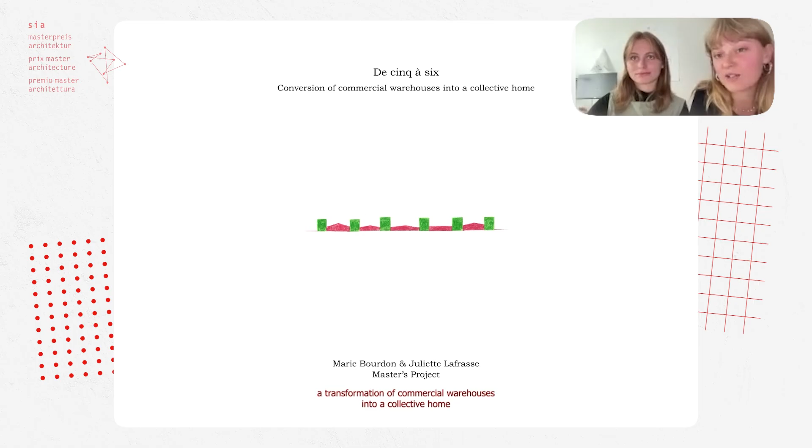For this project, we looked at a specific type of place: commercial zones, suburban areas composed of large retail warehouses and vast parking lots. They are progressively becoming obsolete, functionally but also in terms of values, as they embody a car-dependent and consumption-driven model. Yet in countries such as France, they have proliferated since the 60s and now cover more than 500 million square meters. The question is, what should we do with them?

Besides these two physical qualities, the commercial area endorses a key role in this monofunctional peri-urban area, where individual housing neighborhoods have been planned without any public spaces. They nowadays act as centralities and social hubs.

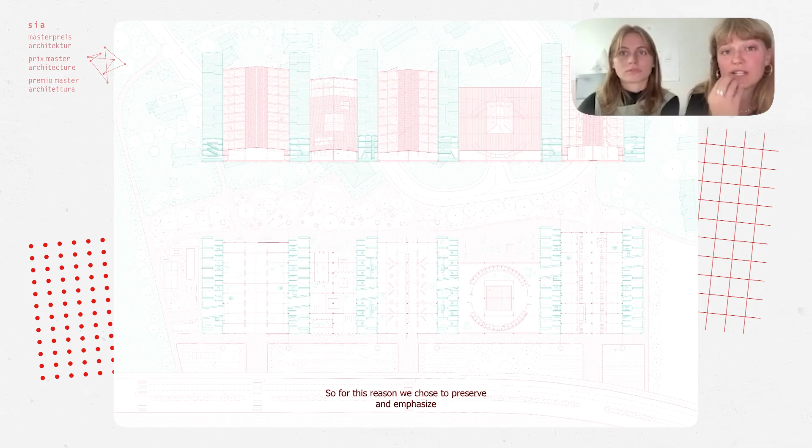As we can see on this map, where red represents publicly accessible area and green non-publicly accessible area, the only public spaces of the area are actually these retail shops and their parkings. For this reason, we chose to preserve and emphasize this public asset of the warehouses, making them collective spaces, and insert new housing blocks between them while revegetating the parking area around.

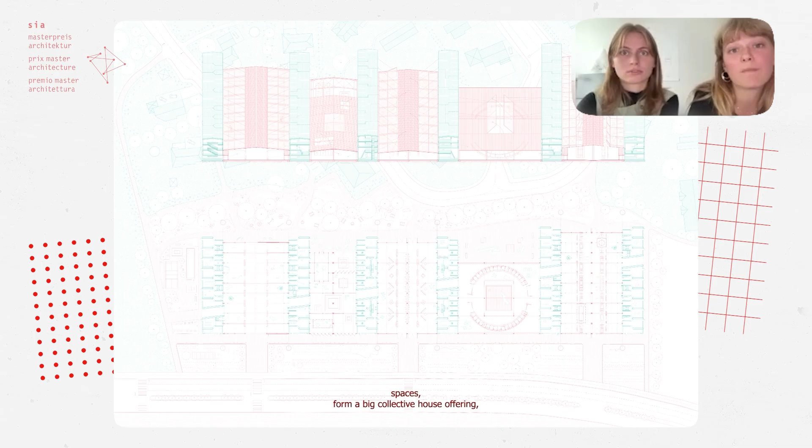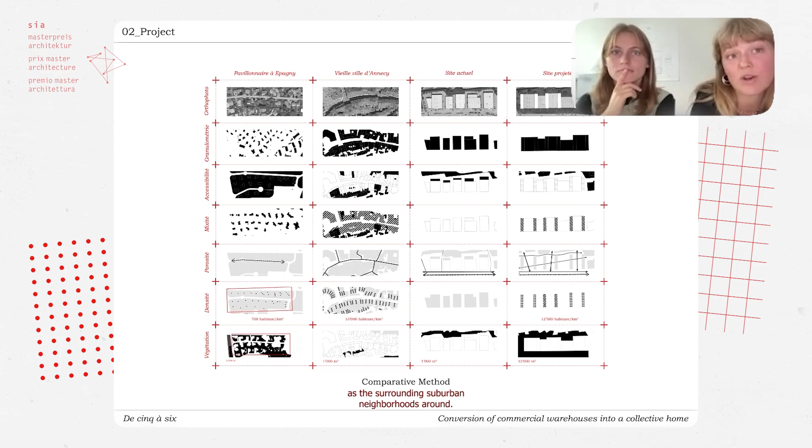So together, these elements—the green, more private housing blocks, and the red, more public collective spaces—form a big collective house, offering, as seen on this diagram, the same density as Annecy's old town, while proposing as much greenery and extra indoor private space as the surrounding suburban neighborhoods.

Indeed, our intention was to introduce housing as a way to bring density, offering an alternative to the individual house, which consumes vast amounts of land and resources, as we saw earlier.

To do so, we designed compact and adaptable dwellings, able to evolve over time and avoid under-occupation, thanks to flexible layout, staggered and negotiable rooms between dwellings, and a wide diversity of typologies, as we can see on the plans.

At the same time, the small apartments benefit from the extra space and characteristics usually found in single-family homes, here reinterpreted within the large existing halls.

Indeed, familiar rooms that we usually find in those houses, such as the garage, the living room, the kitchen, the bedroom, and the bathroom, are here reinterpreted within the large existing hall at a community scale, into public interiors that foster encounters, mutual support, and mostly the sharing of resources and space.

After all, who hasn't dreamed of a garden with a vegetable patch, a workshop for tinkering, or a veranda for gathering family and friends? In our project, these aspirations are not abandoned, but collectively reimagined.

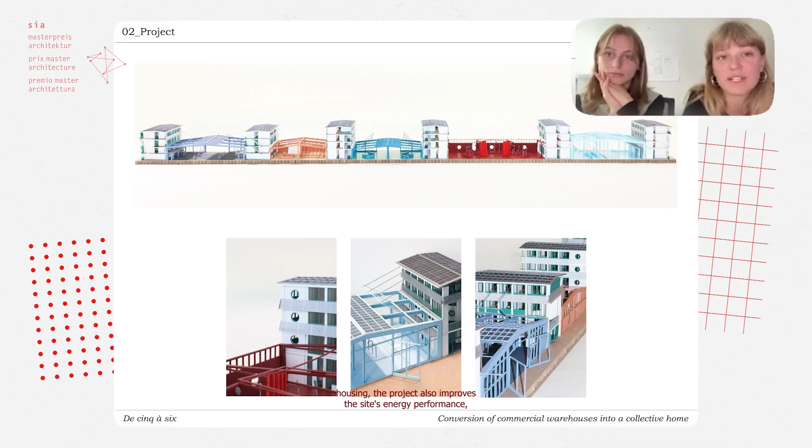Beyond housing, the project also improves the site's energy performance. The massive structure of the newly inserted dwellings, these thick walls, provides thermal inertia for the non-heated warehouses, thus ensuring stable temperatures throughout the seasons.

Meanwhile, the morphology of the warehouse itself is turned into an asset. The lightweight frames and expansive roofs are perfectly suited to bioclimatic devices, hosting photovoltaic panels, rainwater harvesting systems, and passive heating strategies. In addition, the entire site benefits from natural ventilation, ensuring comfort while reducing energy use throughout all the seasons.

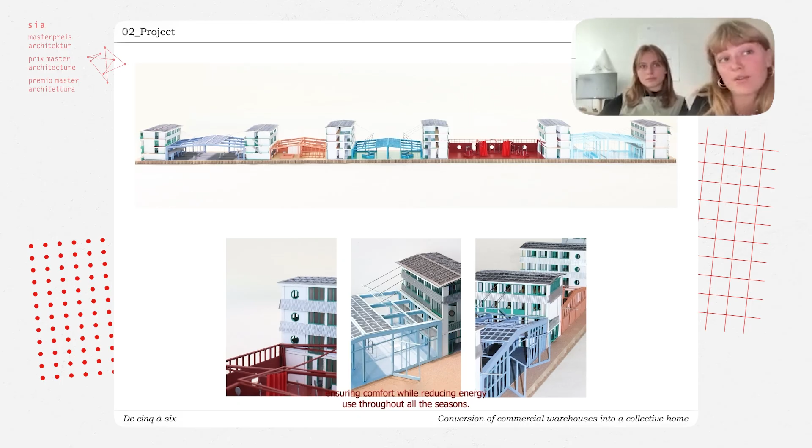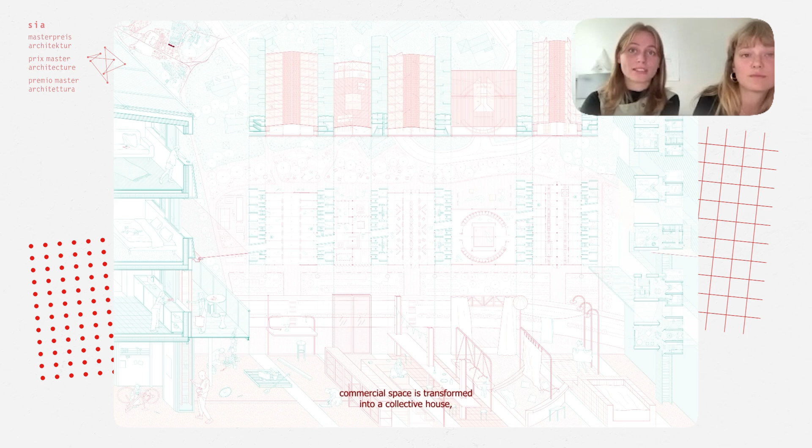To conclude, as we can see on this final layout that combines all the scales we used for the project, an entirely artificial and exclusively commercial space is transformed into a collective house, which is a social catalyst and a place for sharing resources. The project thus stands as an emblematic example of virtuous transformation for soon-to-be-obsolete suburban landscapes, combining energy efficiency, density, and quality of life.

It aims to offer a concrete and replicable vision for the future of commercial zones and the regeneration of more independent urban peripheries.